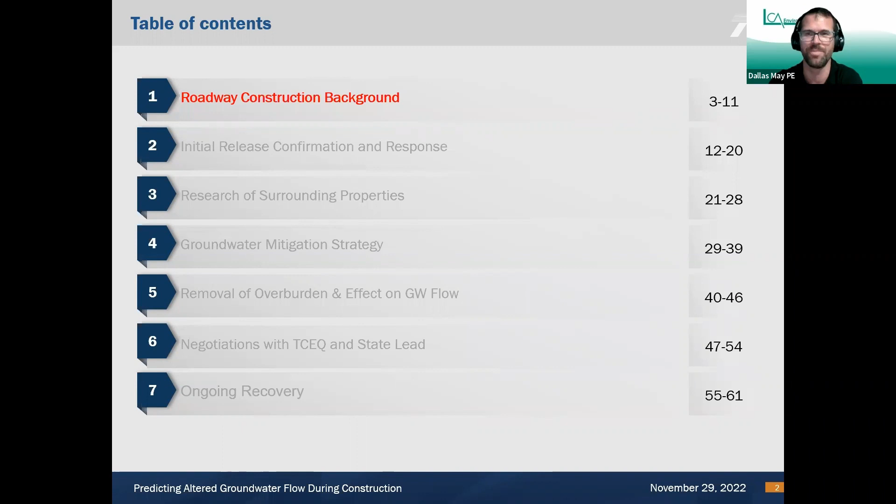Thank you, Mark. As Mark said, I'm Dallas May, an environmental engineer with LCA Environmental. I was asked to share a little story with y'all today that I think you'll find a lot of fun. Our story is broken up into little chapters that I'll read out to you.

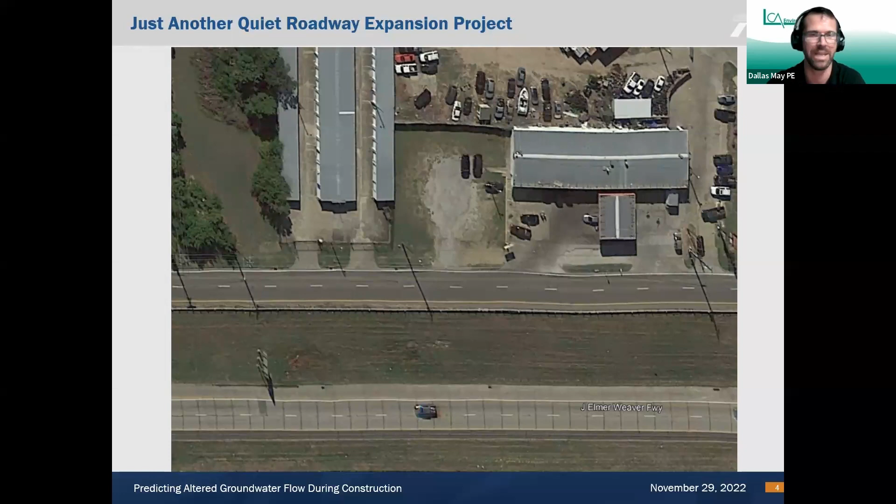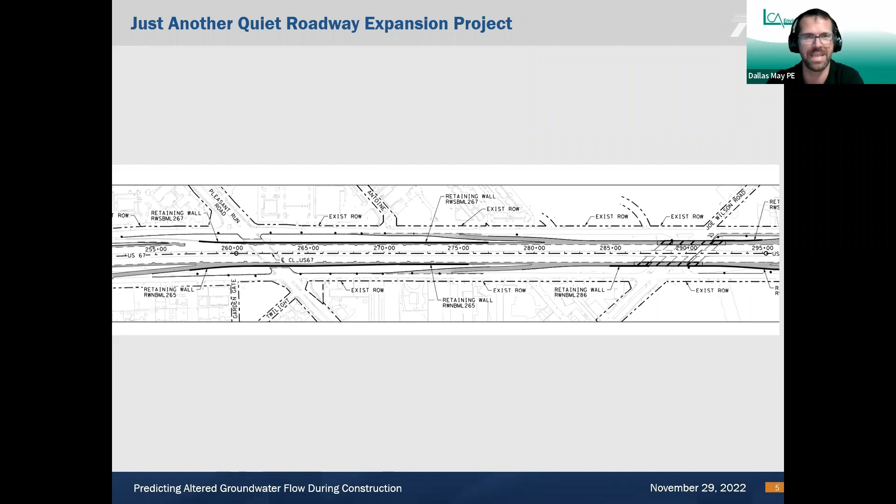The build alternative would expand the existing facility from 4 lanes to 6 lanes, including 3 12-foot main lanes in each direction. Also included in the plans was the addition of a new entry ramp coming off of Pleasant Run Road. No new land acquisitions were needed for this project. All in all, this is a pretty classic TxDOT highway expansion project. And like a classic TxDOT highway expansion project, the build alternative schematic concept was approved and passed on to the design engineers.

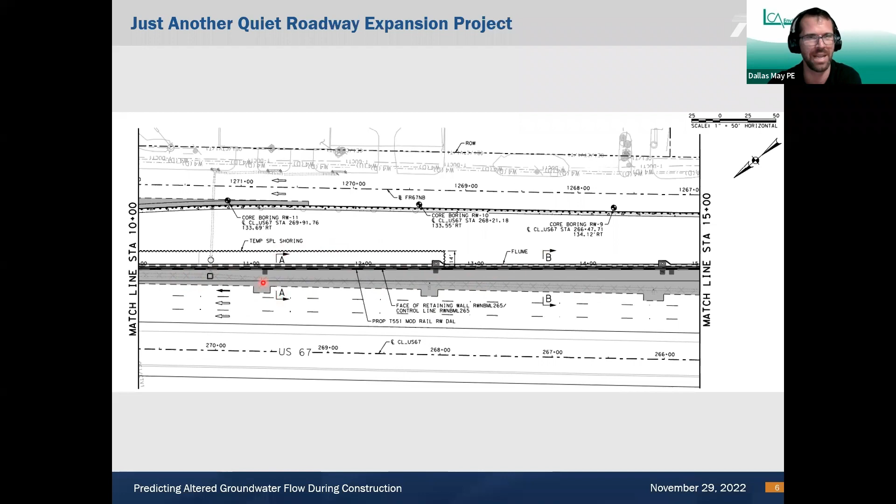The engineers decided they were going to need to cut back the slope a little bit and install some retaining walls in order to get their 3 12-foot main lanes. Geotech borings were drilled and engineering plans were finalized, and the project went to bid. So they're cutting back this area and installing these two different retaining walls, retaining wall A and retaining wall B.

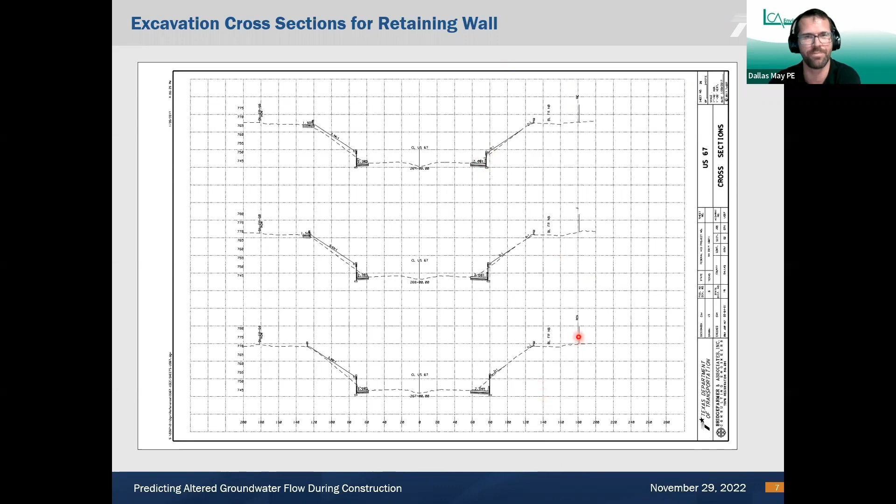The final roadway cross section didn't actually change all that much. The retaining walls would be about 10 feet high, and just a little bit of cut was ultimately going to be changed from the existing schematic. Just a little bit of slope was going to be taken based on the cross section. But of course, most everybody tuning in today is going to know that there are in fact different types of retaining walls. Our retaining wall that we're interested in required quite a bit more excavation beyond what would be suggested by the cross section.

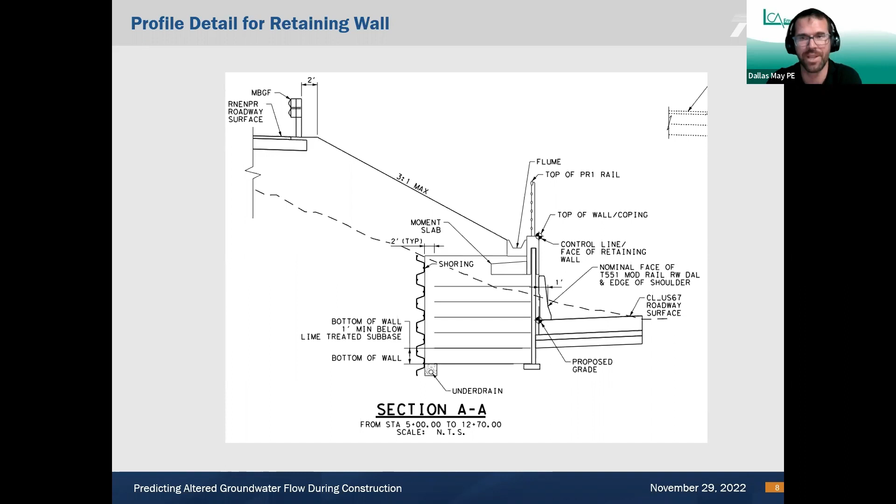In this retaining wall, the space between the shoring and the face of the wall was filled with crushed concrete. So you have the face of the wall and the shoring where they're going to be cutting out. An under drain was to be installed at the base of the shoring. At the back of the construction, the under drain was placed to collect the shallow groundwater that would be flowing in from the freshly cut rock face. So all in all, what was originally a simple design has become a significant modification to the ground.

So the engineering stuff is out of the way, and we go to bid. The plans were bid by TxDOT as a cost plus contract. A winner was selected, and construction began in 2017. In the fall of 2017, the contractor began excavating out our retaining wall.

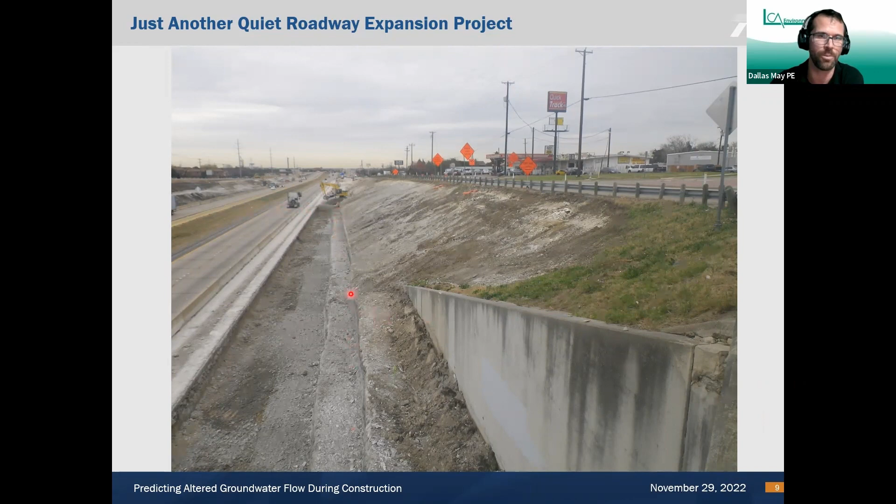Now, with construction full speed ahead, it's clear that the excavation of the slope is creating quite a significant change to the existing ground surface. The geology that was hiding behind the ground is starting to divulge some of its secrets. You can see some clear layers of geology, some sandy clay at the top, some weathered limestone start to show, and alternating layers of competent limestone begin to form.

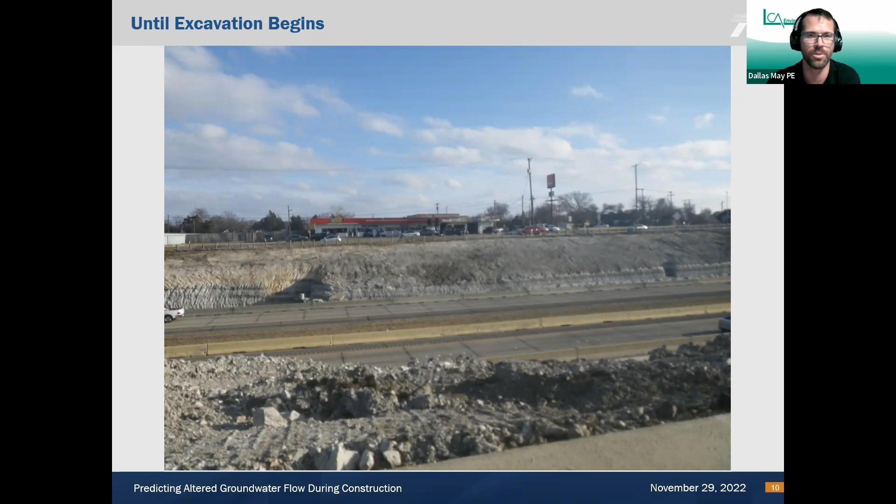Again, the excavation of the slope of the wall is significantly altering the current geology, the current land surface. We're really cutting back from this road now. And again, the geology is starting to show what's underneath. Here's another picture that shows about 8 feet of clay and silt at the top, followed by a strata of weathered limestone, followed by competent limestone underneath.

Right at the top of the weathered limestone, the groundwater is beginning to seep into the project area. This is not a surprise. This was expected. Multiple geotech borings collected in this location showed that groundwater should be expected in this area to seep in. TxDOT engineers were well aware of this and designed this into their retaining wall structure.

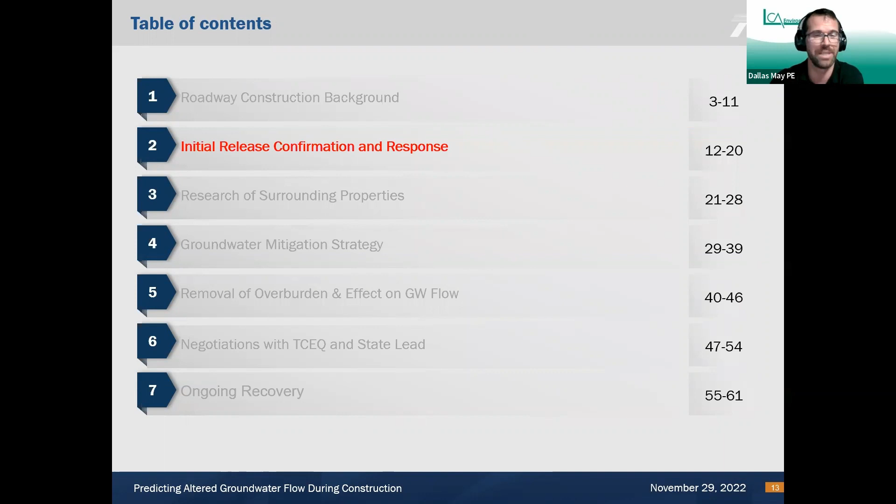Chapter 2, the initial release, confirmation, and response. The contractor's employees immediately recognized that the groundwater was pretty funky as soon as they started cutting into it. It had an odor, it had a visible rainbow sheen, and was leaving an unusual rust stain on the limestone.

The contractors here did everything that they should have done and everything right. They immediately recognized that something was a problem. They took immediate action to prevent additional contamination release and dug a shallow trench to collect the contaminated groundwater and contacted their TxDOT project managers. The TxDOT project manager called Environmental, ENV, in Austin, and ENV in Austin called us out to investigate.

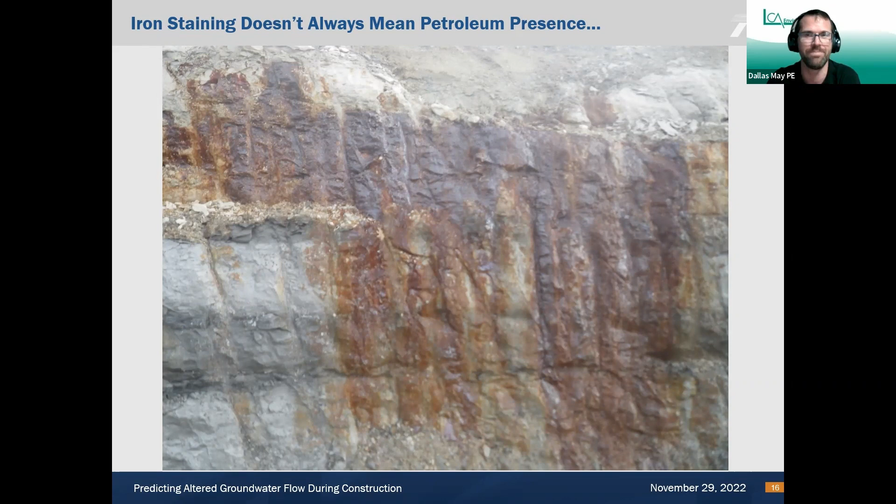That rust staining was particularly interesting. Chemically, what's happening here is that the rust color is indicative of a reduced iron environment, likely from anaerobic microbial decomposition of petroleum in the groundwater. This isn't always the case, but there are processes that can cause this. But in this case, it started to look pretty suspicious. There's a lot of red staining pouring out of the rock.

What's nice about this rust is it gave us some very good clues as to where to expect to look for contaminated material, contaminated groundwater. This will come in handy in the future. We'll just put a pin in that and come back.

So LCA received our work authorization to investigate the impacted zone, and in December of 2017, LCA determined that the groundwater was seeping from that thin, weathered, fractured limestone approximately 5 to 8 feet below the natural ground surface, and that it did in fact contain petroleum hydrocarbons, likely originating from a Quick Track service station about 100 feet southeast and up gradient from our impacted zone.

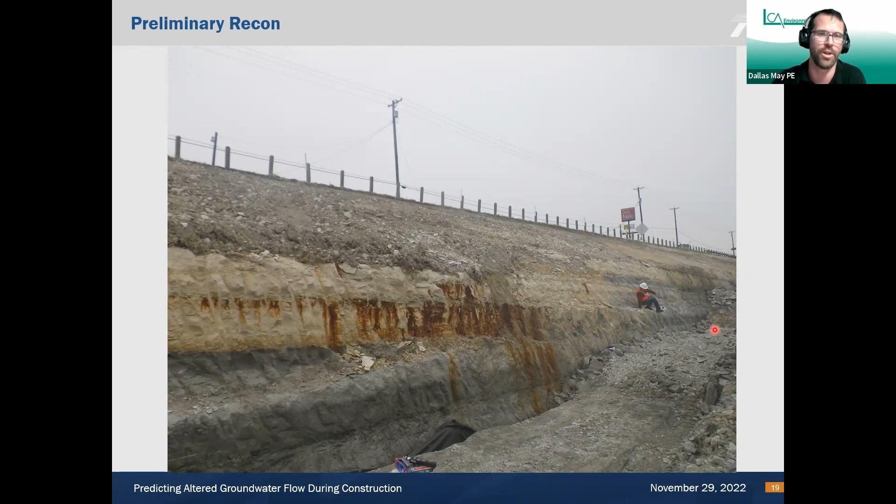Again, the contractors did everything that they should have done. They immediately recognized the problem and they took immediate actions to prevent additional contamination release. But this is still a cost plus contract. And you can imagine that the poor, sad contractor is now sobbing to TxDOT and telling everybody that this is just unacceptable and holding up the project. And so we know that this project can't stop.

We run our initial sampling and confirm gasoline compounds in the groundwater. We do have to protect the public, the environment, and the construction workers from the hazardous chemicals that are now flowing into our project area. And we have to keep the project moving forward. So we come up with a simple plan of site reconnaissance with soil and groundwater sampling, trenching to capture the seeping groundwater. We prepared a soil and groundwater management plan and managed the soil excavation and disposal.

Dealing with the soil was pretty straightforward in this case. There's no time to catch someone up, so I personally directed the excavation in the impacted areas and monitored and directed the segregation of impacted soil, which primarily consisted of that layer of weathered limestone, from non-impacted soil, which is most of the other soil.

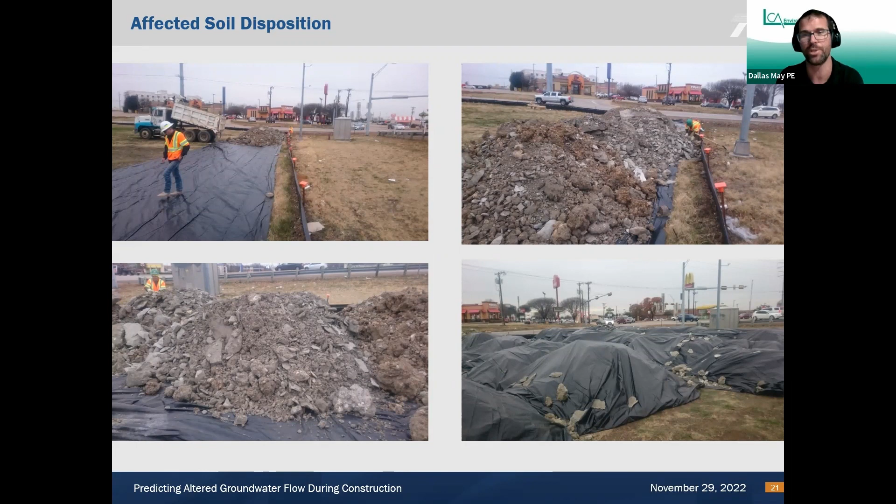So LCA received our work authorization on December 5th, and we kept the project going, and we had the wall fully excavated and ready for construction of the retaining wall, and all the soil profiled and disposed of by January 7th.

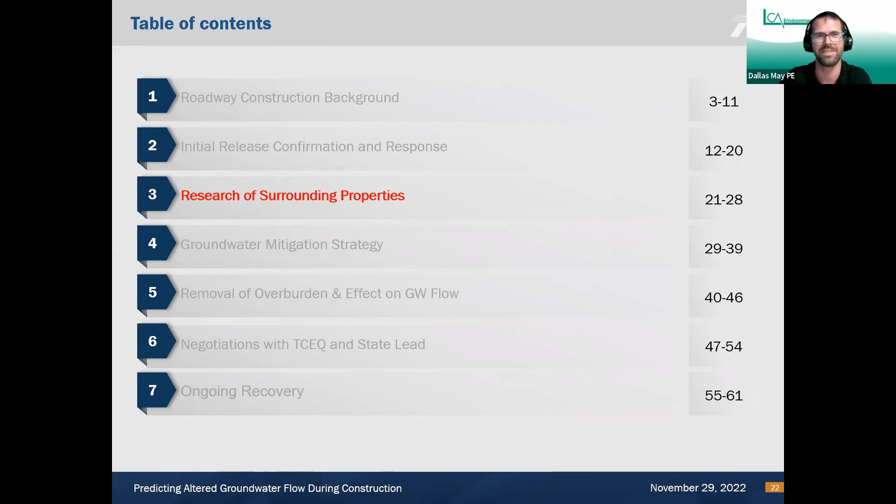Which brings us to chapter 3, the research of surrounding properties. So we're going to go back in time just a hair to when this project was still in the planning phases. For this roadway project, and for most every roadway project, TxDOT has the process to identify hazardous material risks like this, called a hazardous material initial site assessment.

So we recommend these hazardous material initial site assessments on all TxDOT projects. It's very similar to an environmental site assessment for commercial transactions. We recommend this even when a project isn't purchasing additional right-of-way. So this ISA was performed by Hicks and Company, and it included a regulatory database review.

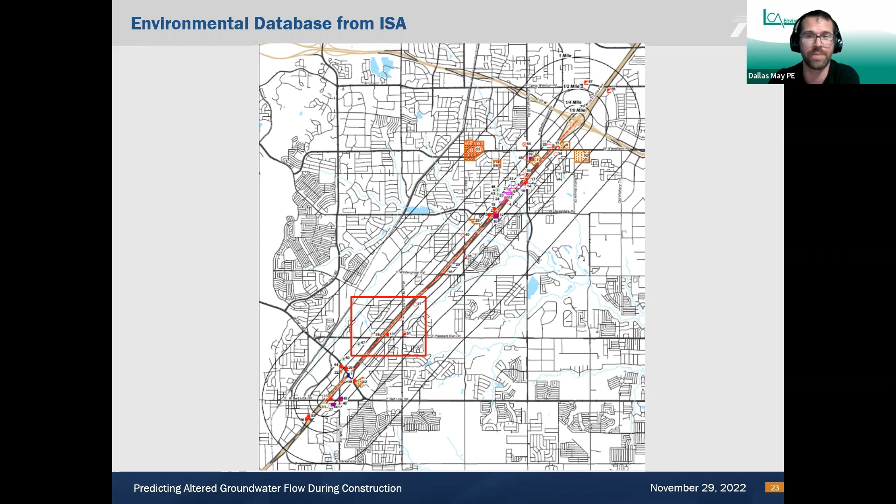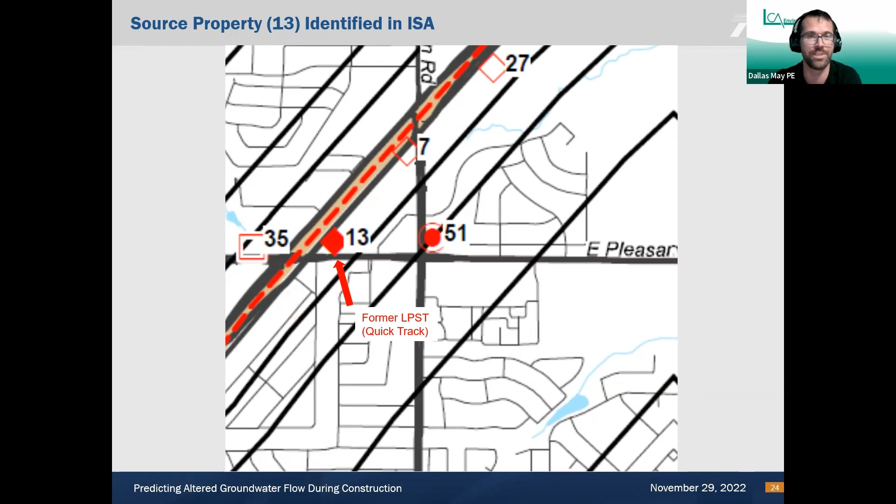Further, in the regulatory database review, our gas station, our Quick Track, was identified as a potential leaking petroleum storage tank adjoining the project site. So the question had to be asked, how come we are just now dealing with this during construction? Well, in the ISA, the site was determined to be a low potential for impact.

And the ISA read, based on no additional right-of-way proposed from this property, the topographic gradient in relation to the project area and case closure, the site is considered a low environmental risk. Now, as much as I would love to be able to throw a competitor under the bus here, that's not where the statement ends. The statement continues, should design plans change to include excavation activities adjacent to the facility, this site would pose a higher risk to the possibility of encountering affected material.

So all in all, this site was not missed in the ISA. Hicks and Company were working with the design schematics that they were provided in the early planning stages, which they included in their appendices in the ISA. And those schematics didn't show at the time that there would be significant cut for a retaining wall. That was added on later.

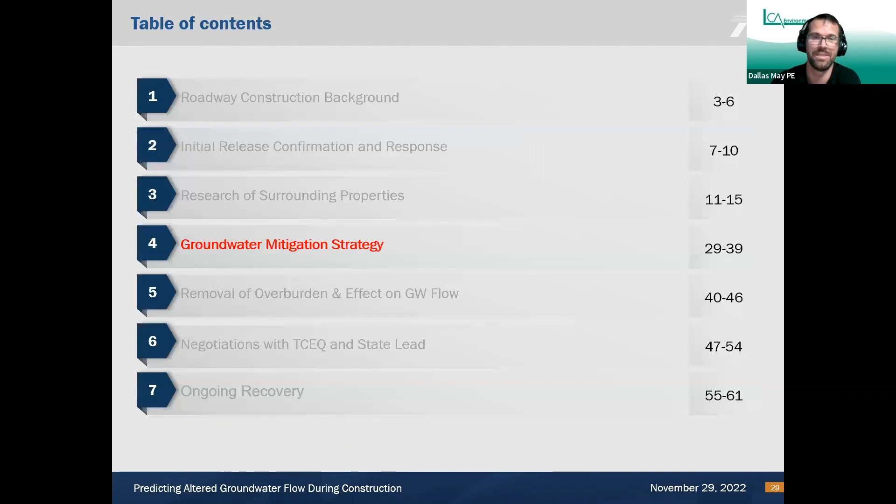They left this note, they left this warning for anybody that would heed it. And ultimately, additional excavation activities is exactly what would happen. So back to the project. Groundwater mitigation strategy.

So let's go back to that retaining wall detail. With the soil contamination now taken care of, we still had to deal with the incoming groundwater. The groundwater hasn't stopped flowing. If the wall was constructed as originally designed, the underdrain down here would serve as a collector for the contaminated groundwater and then pipe it and release it directly into the environment. Obviously, that could not be allowed to happen.

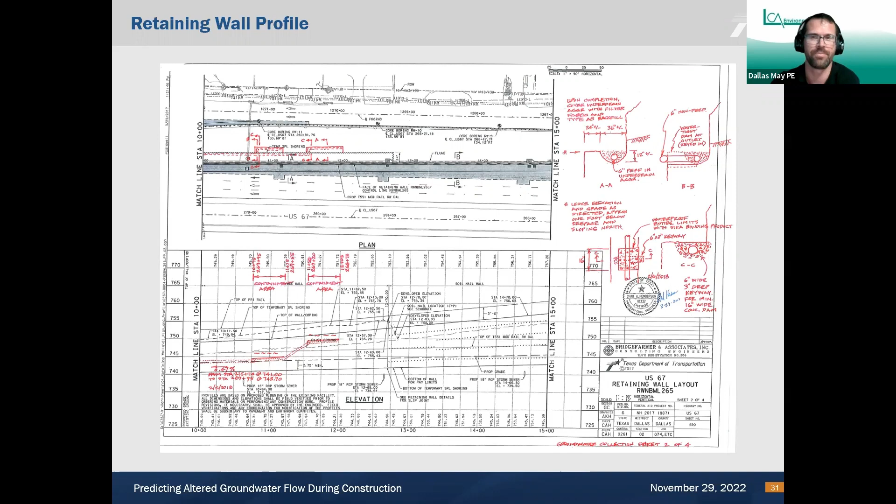So the plans had to change. We helped HNTB modify their original retaining wall plans to create a permanent trap and collector, which would collect and segregate the impacted groundwater and prevent it from being released into the environment with the regular stormwater. The modifications worked as follows.

We would dig out a new collector trench above the underdrain to collect and trap the contaminated groundwater. The trench would be lined with HDPE, a plastic liner, to prevent seepage through cracks in the limestone. And a slotted pipe was to be installed in the trench that would carry the contaminated groundwater to a collection sump where it would be accessible to a vac truck. And that way we could segregate off the contaminated groundwater from the clean groundwater and the stormwater.

So here's another look. We have a perforated pipe inside a trench that would need to be cut out of the wall. Down here is the non-impacted underdrain.

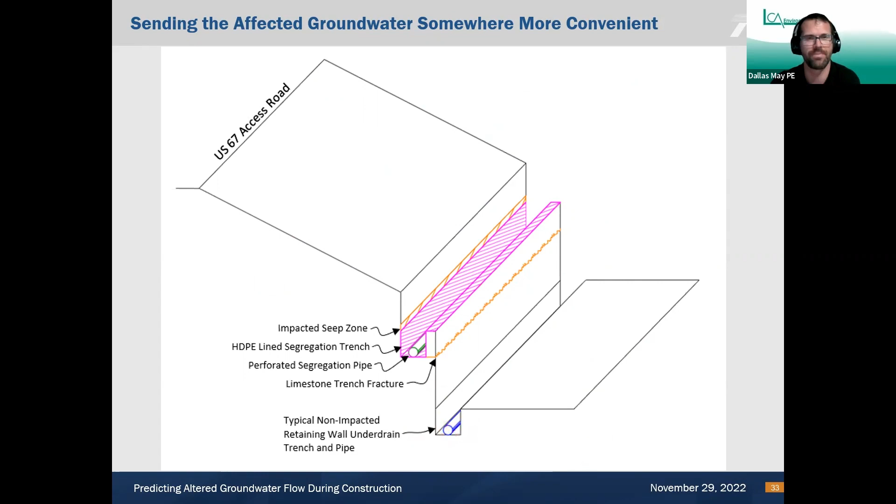So the next question we would have to answer is, where do we install this? Luckily, we had very good geologic clues with that red staining. The rust staining provided the exact location where the contaminated groundwater was confirmed to be seeping out into our project area. And the contaminated groundwater was confirmed through laboratory testing.

If we could just block off just these areas, we could optimize our collection system and minimize disposal cost. We don't want to be disposing of groundwater that isn't impacted. So we focused on just the areas that the geology was telling us that's where the contamination is coming from.

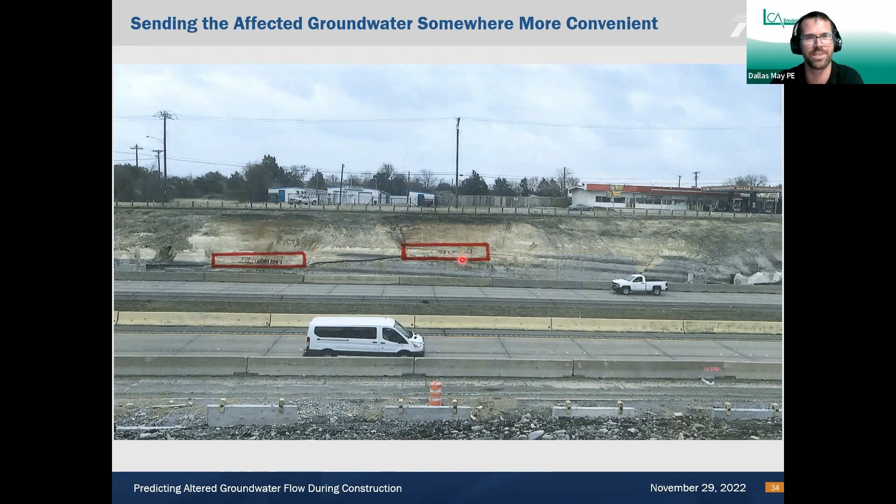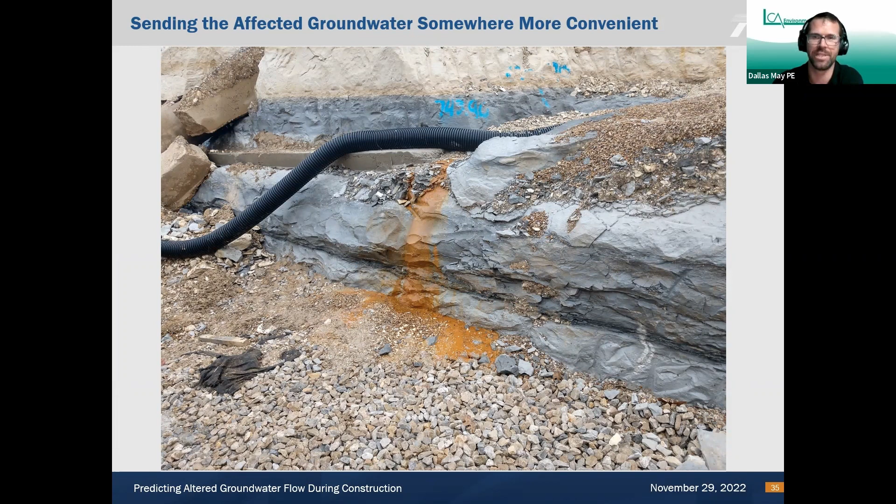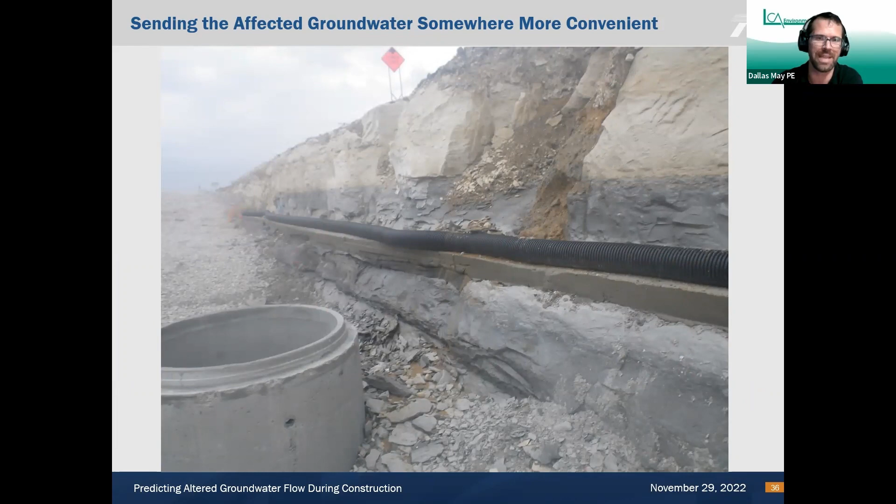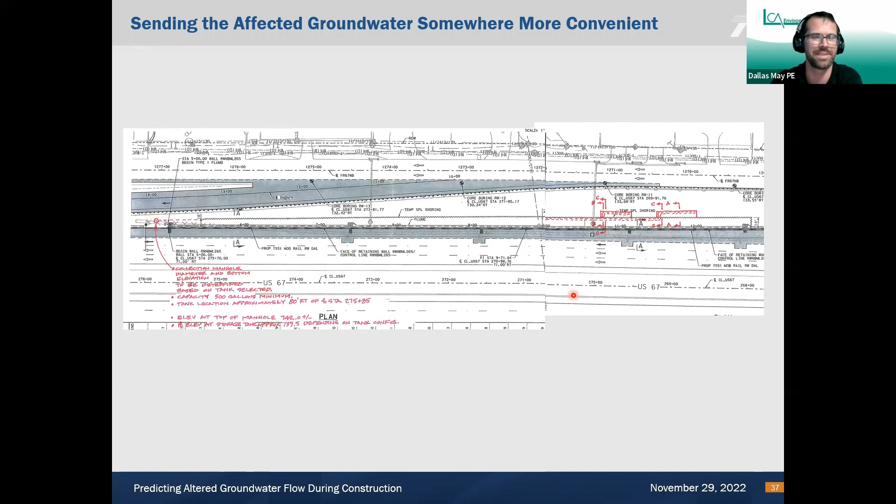For the collection system, a clay cap was added at the end to trap the contaminated water that was being collected in the trench. And a shelf was constructed to hold the segregation pipe that runs all the way down the hill to a location where it could be accessible to a vac truck. And that was quite a run, actually. It ended up being over 700 feet to get to the place where it could be accessed by a vac truck.

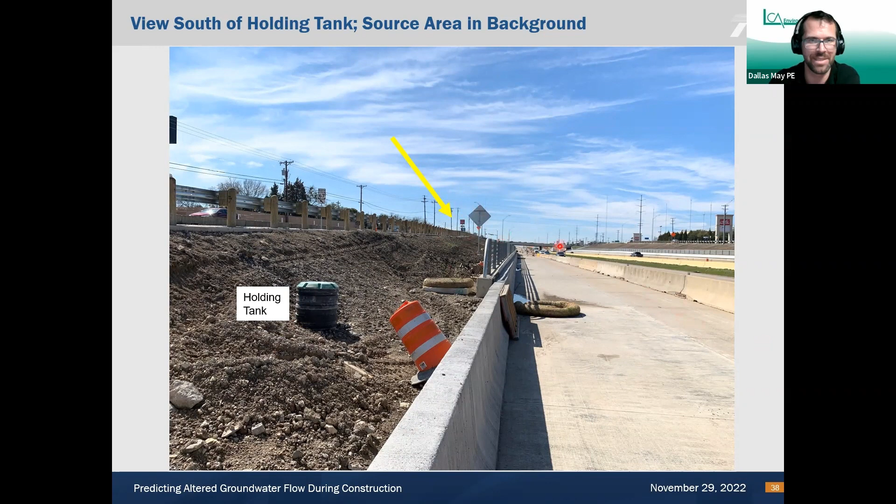At the end of the new drainage pipe, the contractors would install a holding tank with a manhole, and the holding tank had to be constructed so that a vac truck could drive up to it and clean it out, because the impacted water wasn't going to stop flowing anytime soon. And the yellow arrow back here, just to give you a sense of distance, that's our gas station. And you can also see the overpass for Pleasant Run Road. Here's another view of the location for our holding tank.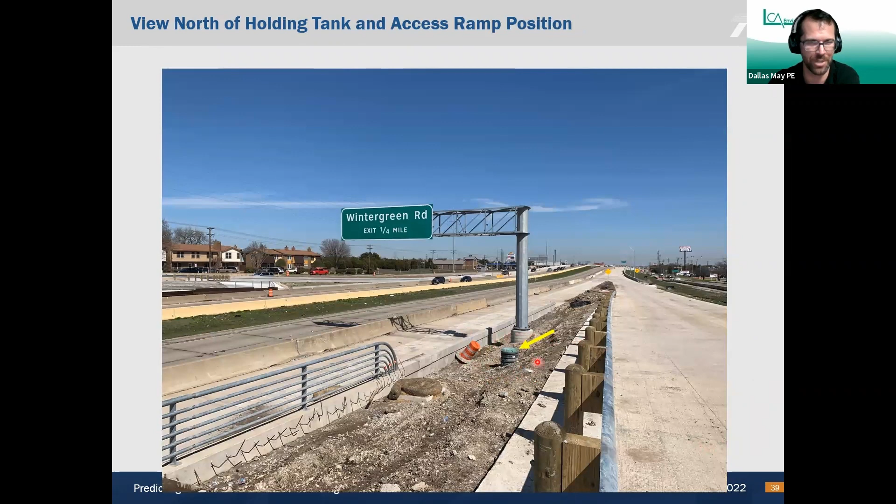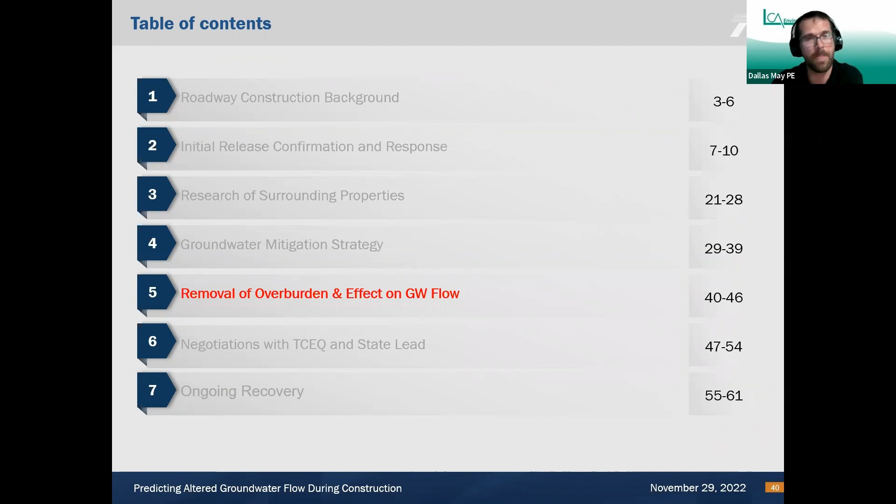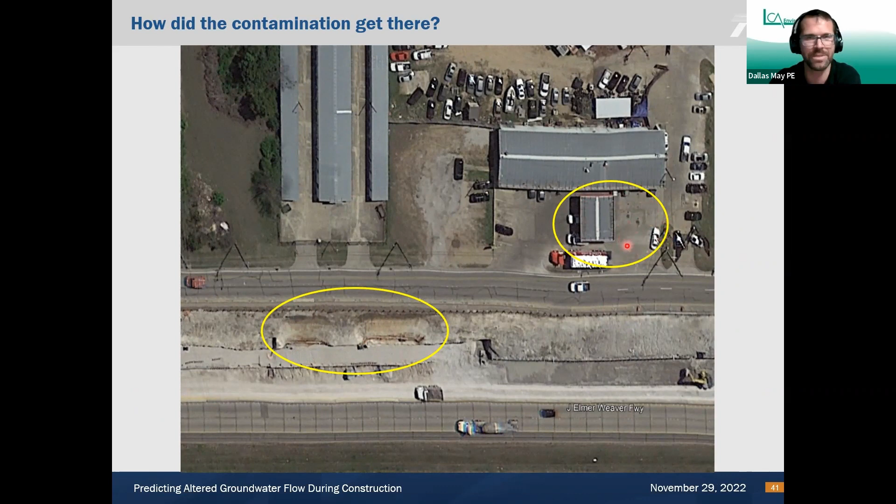Which brings us to chapter 5, the removal of the overburden and effects on groundwater flow. So how did this happen? If you're paying close attention, you might have noticed that our contaminated zone doesn't really look like it's all that near to the gas station fueling facility. How did groundwater get from here all the way back over here? Well, if you look carefully, there's another clue in the geology.

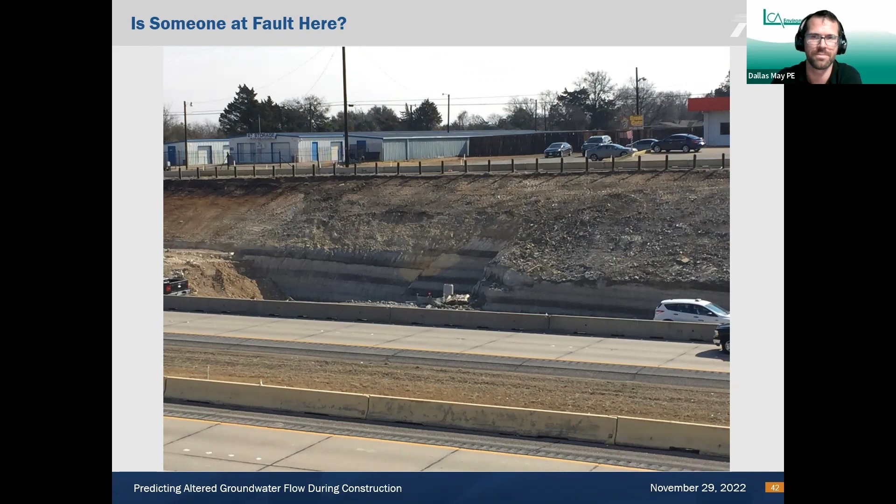You'll be hard-pressed to find a more textbook fault than this, especially with the very nicely colored layers of competent limestone. Yeah, humans have not been the only ones moving dirt in this location. At some point in the past, the ground shifted and caused this fracture fault in the limestone. This fracture forced up the limestone near to the gas station and caused a much more complicated groundwater flow pattern.

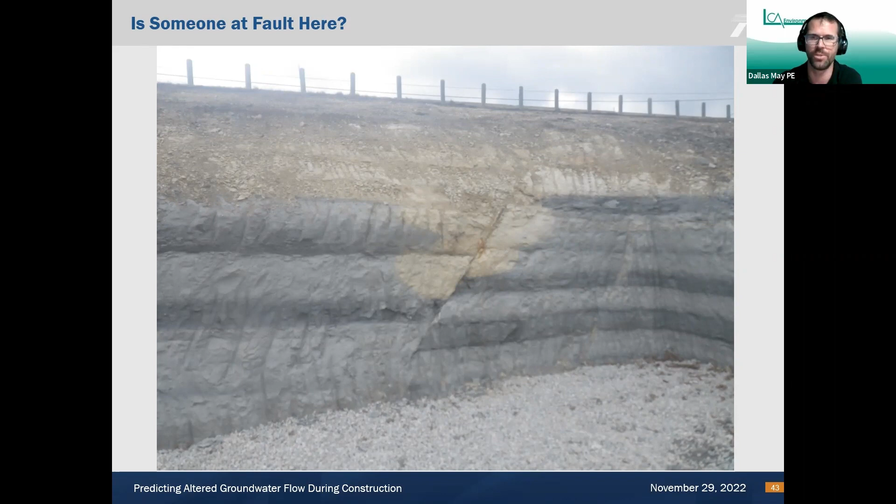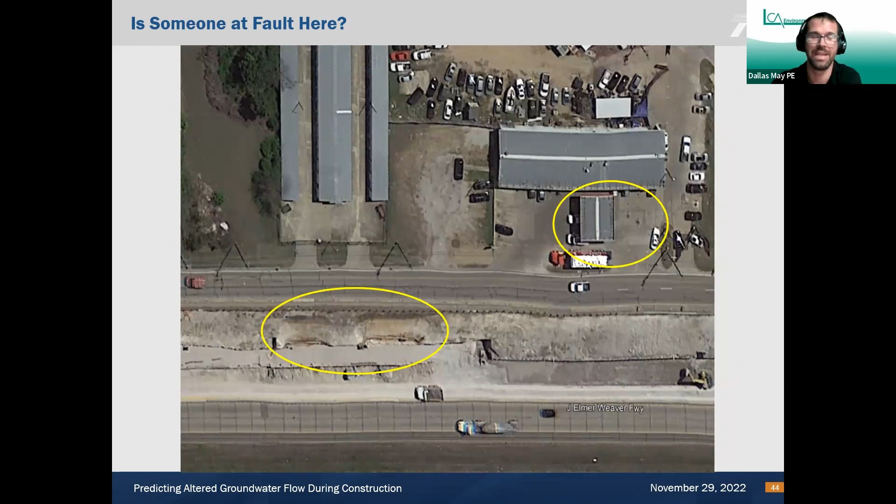When the contractors began excavating out the side for the retaining wall, they created a new low pressure zone, which would become the highway. That pulled the groundwater back in to our construction zone. Yeah, cutting into the wall, as you see here, created a new low pressure zone for the groundwater to flow into and ultimately empty out into our highway construction.

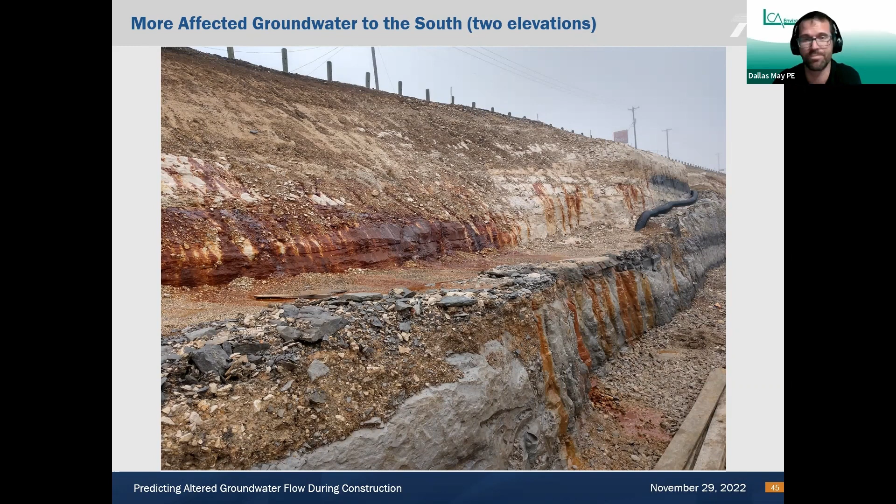So with our collection system in place and operational, TxDOT was now going well above and beyond their call of duty in collecting, trapping, and disposing of the contaminated groundwater. The problem was identified in December, and the entire system was designed and constructed and fully operational by February. And more importantly, the contaminated groundwater was not being released into the environment. So great, everybody pat yourselves on the back. We did a good job, right?

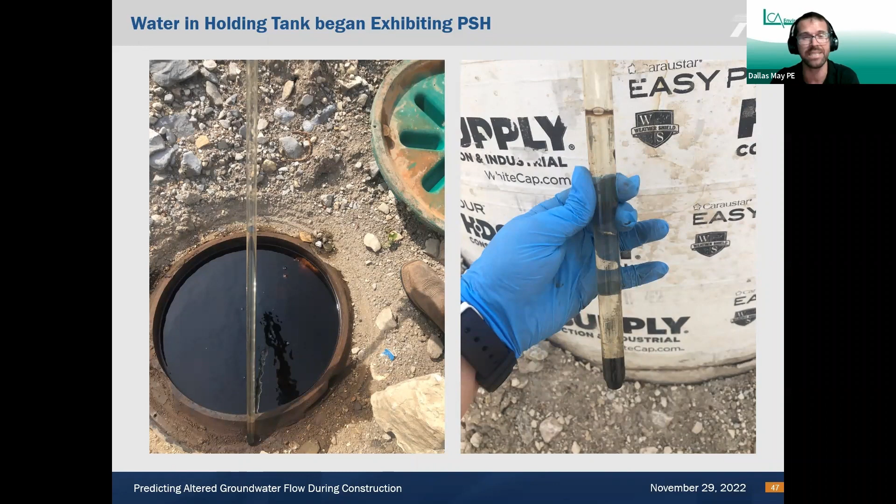Except there's a problem. This is an engineered remediation system. Why is it TxDOT's responsibility to remediate a release that they didn't cause? It was caused by a private business. Which brings us to Chapter 6, negotiations with the TCEQ and the State Lead Program.

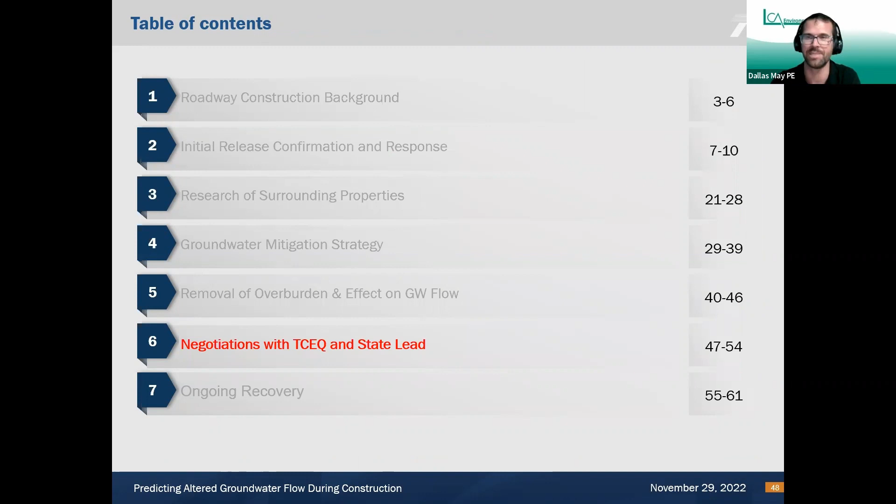So TxDOT continued to send out a contractor to clean out the holding tank and dispose of the impacted groundwater for another whole year. Every few months, their TxDOT contractor would collect a sample and run it to a lab. The contamination wasn't decreasing. So we sent Lonnie Gilley, the local TCEQ petroleum storage tank guru, and the TCEQ in Austin, a letter clearly spelling out everything that we knew about the site and everything that TxDOT had done for this site up to this point. And we told the TCEQ that TxDOT wasn't going to do this forever.

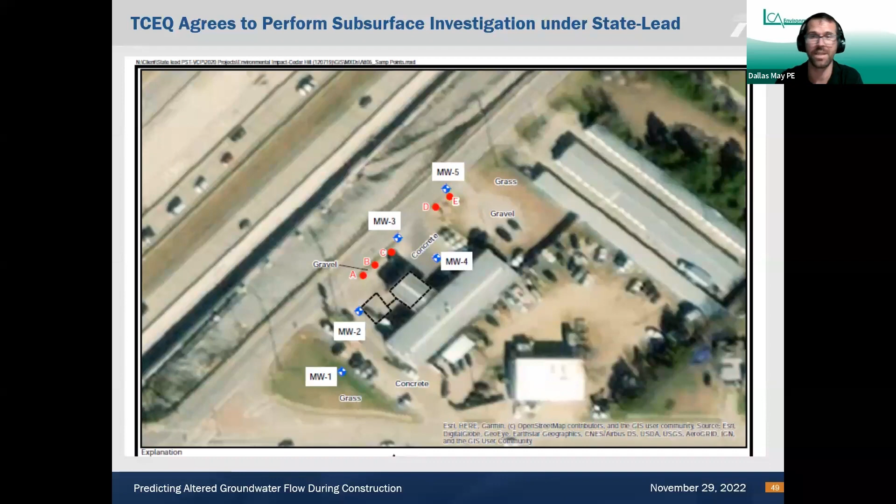So we convinced the TCEQ to reopen the LPST case and place this site into the state's LEAD program, which is their leaking petroleum storage tank cleanup program for remediation. After multiple meetings, we had to send another letter to TCEQ explaining that, again, TxDOT is not in the forever business with this, and we will be decommissioning this system very soon.

Then, in September of 2019 — remember, we had this system fully operational and constructed in February of 2018, so this is now September 2019 — the TCEQ sent out one of their own contractors with the authority to directly investigate the release.

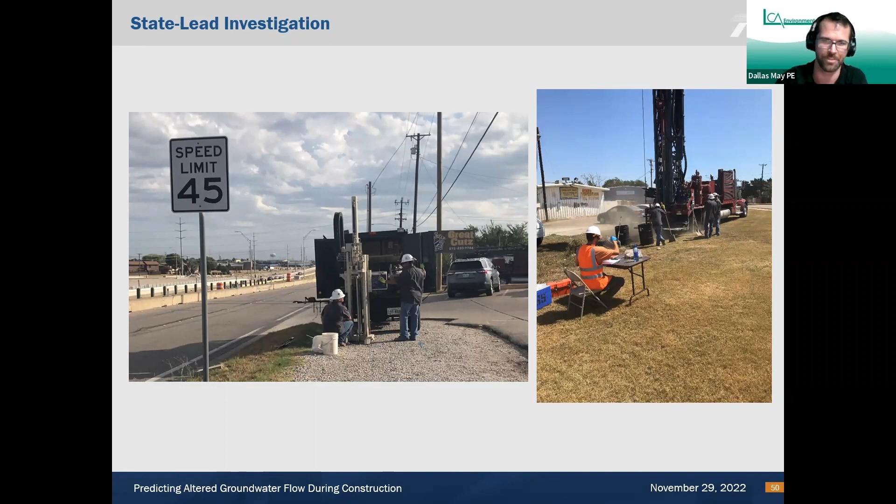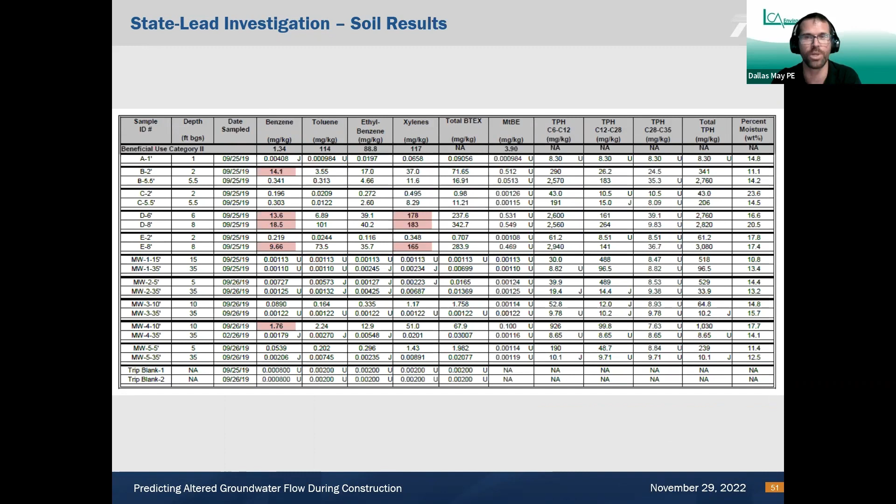And sure enough, just as we predicted, very high concentrations of benzene and petroleum contaminants were identified in the soil around the gas station and in the groundwater too. These numbers alone are high enough to suggest the presence of free petroleum product, meaning a gasoline release, in the soil around the gas station.

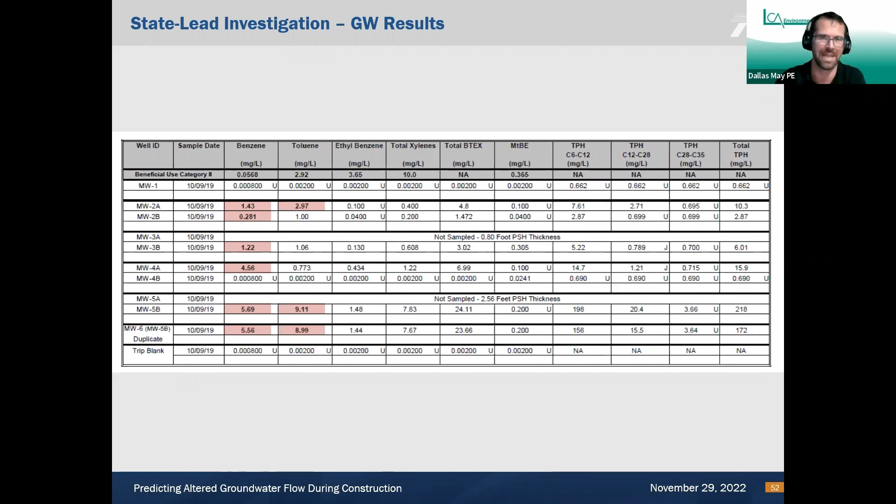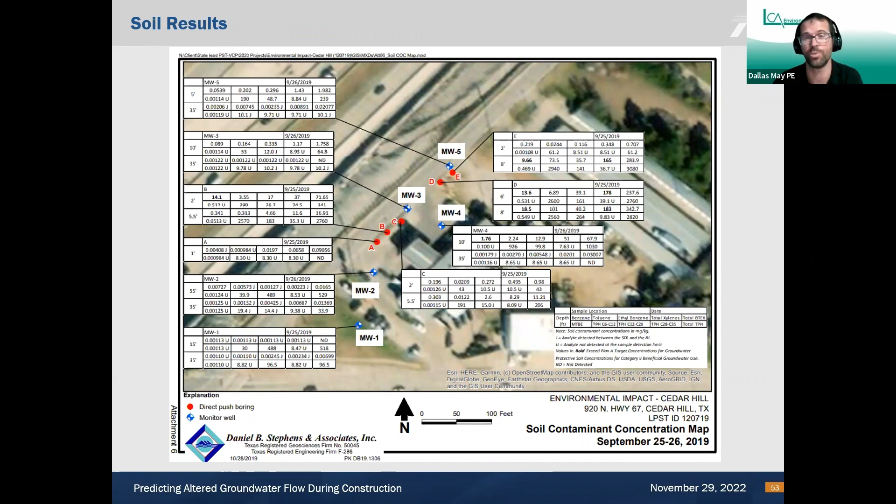And lo and behold, the soil contaminant concentrations increase in the direction of the gas station and toward our excavation area. Same with the groundwater — the highest concentrations were in the direction of our excavation area. The TCEQ's contractor confirmed the presence of phase-separated hydrocarbon fuel in the groundwater.

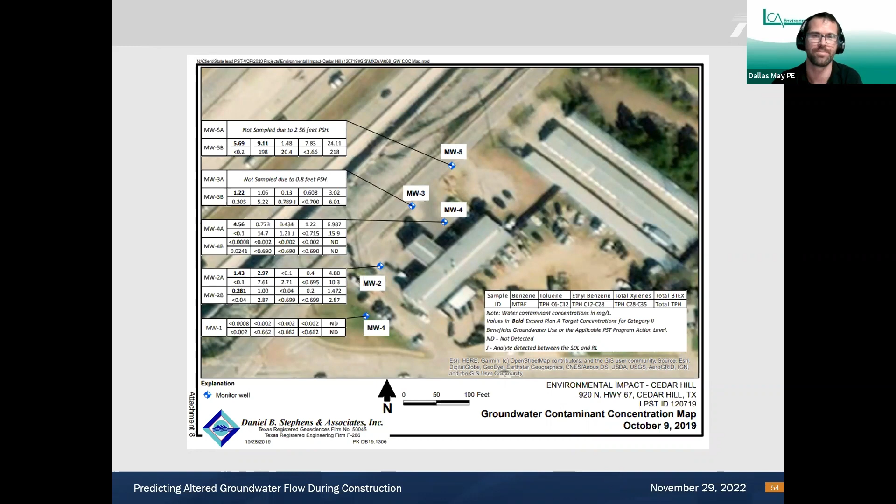A groundwater gradient was produced for the site by the TCEQ's lead contractor, and if you notice, this isn't really an intuitive groundwater direction pathway. As we correctly predicted at the time, this unusual gradient was caused by fractures and the fault in the competent limestone rock, and it just so happened to lead the contaminated groundwater directly to our excavation area.

And then, when the contractors began cutting into the hill to install their retaining wall, they released the pressure from the overburden and pulled the contaminated groundwater directly into their excavation area.

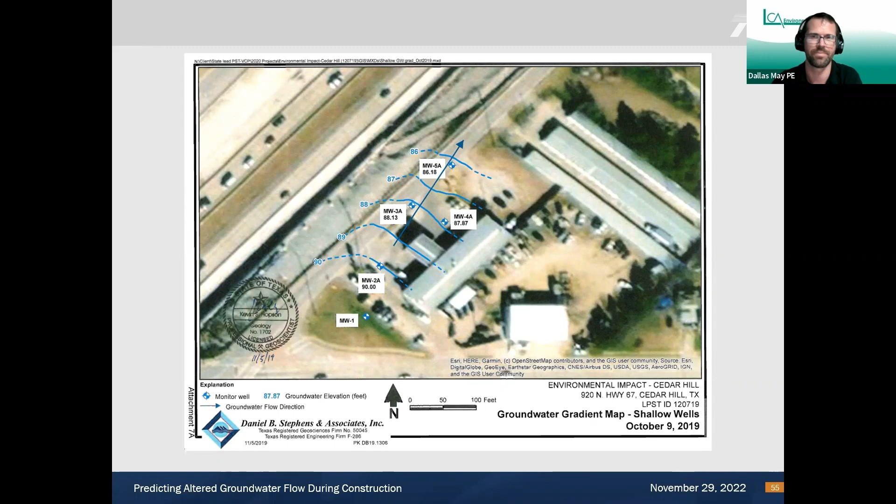Chapter 7: ongoing recovery.

So in October of 2019, with the highway construction at the site nearing completion, the TCEQ finally agreed to take over the recovery operations from TxDOT.

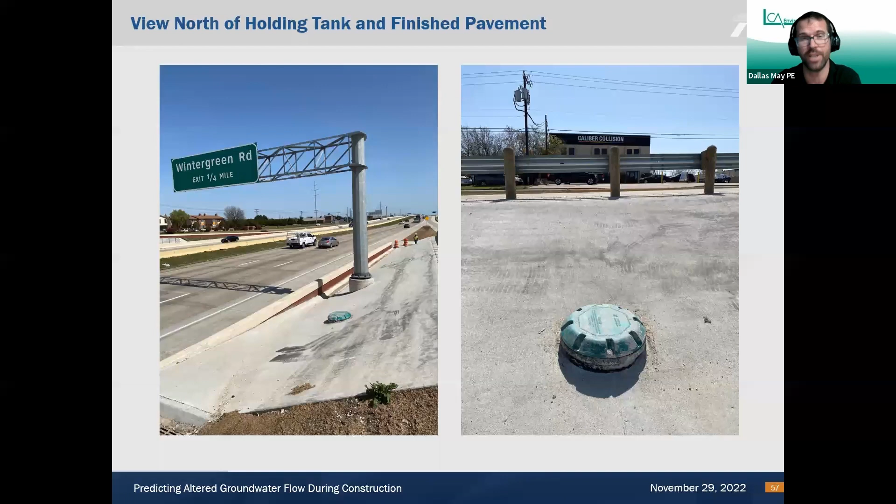So we asked the TCEQ to keep us posted on the recovery actions. We received regular updates on their weekly recovery events through February 2020, when our work authorization finally timed out for this project. The final groundwater recovery event we were informed of was on the 7th of February, 2020.

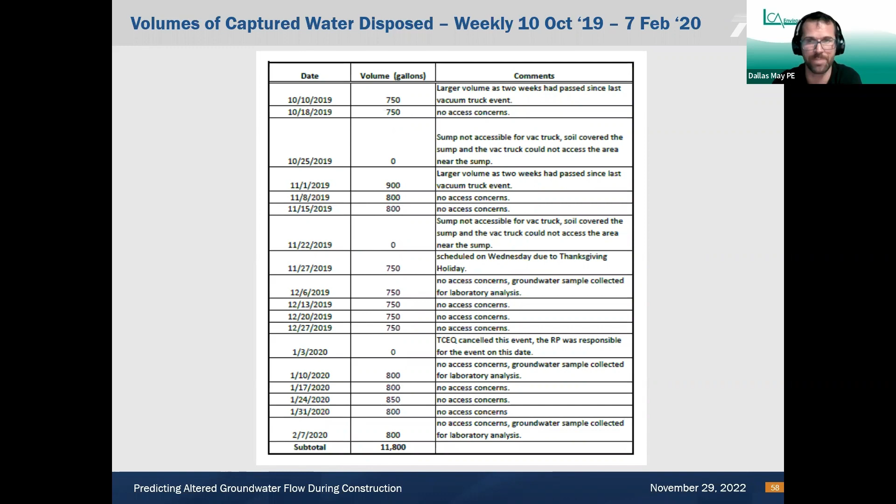And it's now being paid for by the responsible party. We did a final site recon on Friday, February 21st, 2020, and received a copy of the final recovery report from the TCEQ on the 25th of February, 2020.

And in that recovery report, the groundwater emptying out into our collection system still showed significant contamination. It was contamination that TxDOT didn't cause, but that TxDOT went above and beyond to trap, collect, and remediate. And it is contamination that is no longer TxDOT's problem.

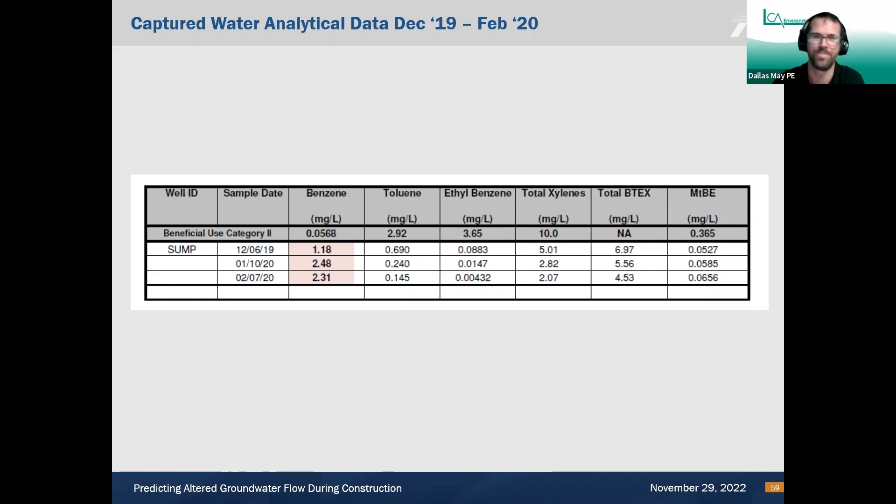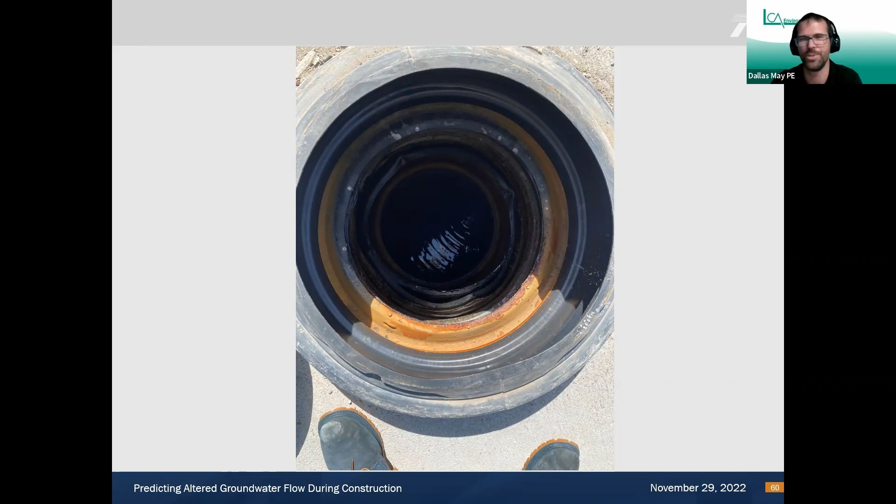And you can still see our little collection system quietly hidden away at the top of an unassuming entrance ramp to US Highway 67 in Cedar Hill, Texas.

So what's the moral of this little story that I've told you? The first lesson is to understand how a project changes the geology.

Just as considerations must be taken for how mechanically modifying your geology will affect the pressures on the structures themselves, also consider how doing so will affect contaminant migration pathways.

And in the event that you have contamination that seeps out into daylight, that contamination must be contained and can't be allowed to just be released into the environment, where it can cause hazards to construction workers, the public, or the nearby environment. Sensitive receptors must be protected.

And if your client, or TxDOT for example, identifies that, they don't have to be in the forever business for somebody else's contamination. The TCEQ is an available resource you can call upon to help hold responsible parties accountable for their own releases, even if it's a release that's entering your work area.

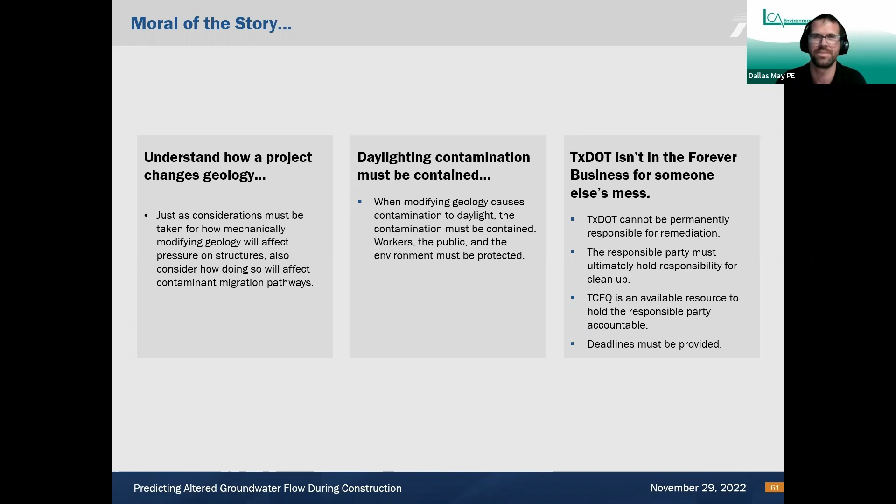But the TCEQ works on their own timelines, and deadlines must be provided to them. Which concludes my little story.

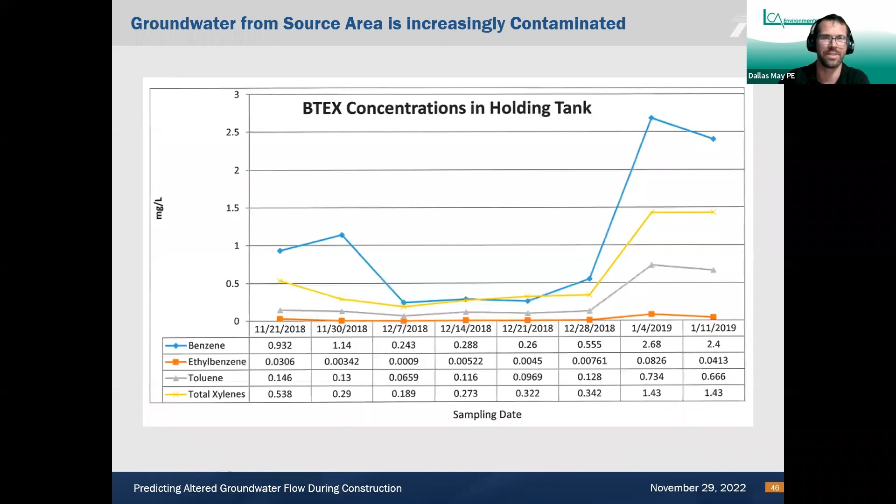Yeah, so the competent limestone definitely acted, as you said Mark, as an aquitard, and we didn't see any groundwater flow or identify any contamination. There were no field indicators of contamination below the fractured limestone and the weathered limestone just below or just above the competent limestone. I think that's a good answer, Dallas.

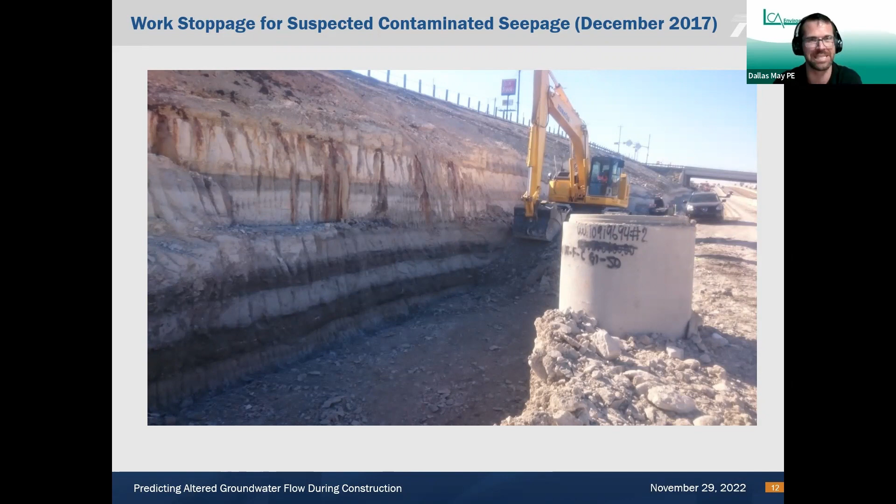Can you flip that slide real quick? Let's see. Did we get that? Where is that photo? Oh well, here you can see how the contractors dug out this trench to try to immediately trap the contamination that they identified. And the groundwater was freezing up in their trench as we were digging it out.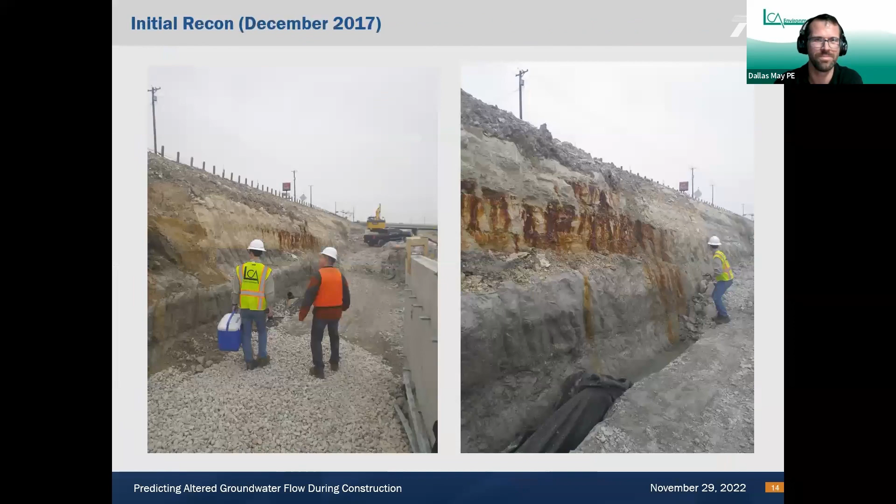Yeah, but I think you had a better one than that, Dallas. I did. Where's it at? It wasn't very far into it. That one? Nope, but that's all ice. That's all ice. Let's see. Oh, this is a good one.

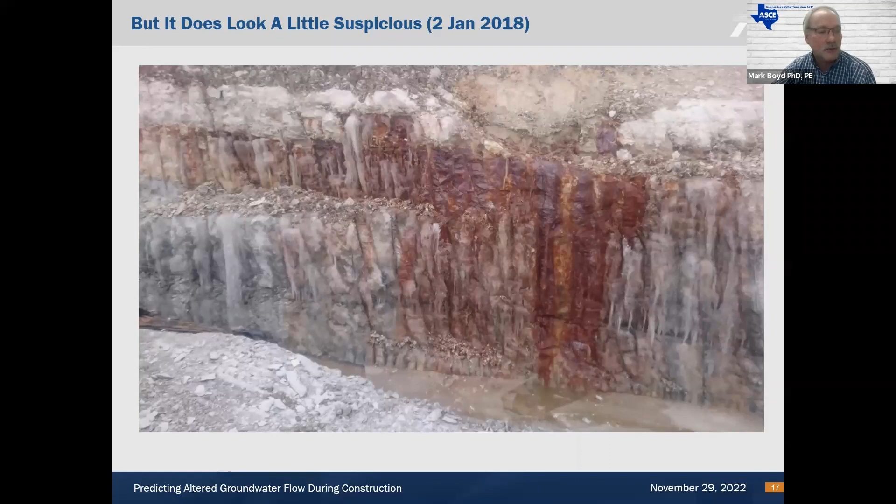Well, at any rate, Dallas, as you said, TxDOT does not check the weather before they pick up the phone and call us out on the site. So they don't worry about old guys like me getting cold. It was pretty doggone cold that morning. And it's a very unique circumstance - there it is - where you see a contaminated groundwater seep daylighting that's also frozen.

Certainly had never seen that before. I had personally never seen that. That's not common in Texas.

No, it's not. I thought there were a few other questions, Dallas. I think maybe those were taken as part of being very related to the same questions. Those were outstanding questions because they show the audience was really thinking about what we were doing out there, what the long-term consequences could be, and whether we put any thought into this.

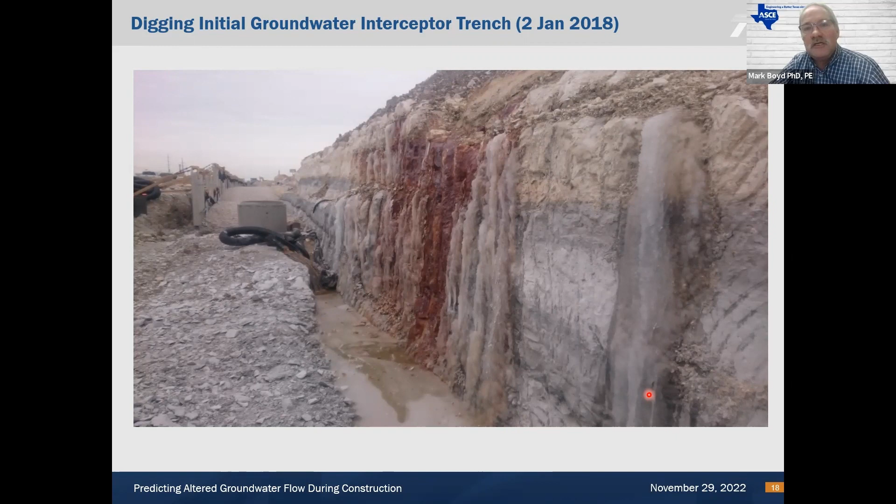Here's one more question, and then we could probably stop there. Can the oily wastewater be treated in situ using bacteria? That's the question. Sure, so the biggest problem with doing that is, yeah, there are...

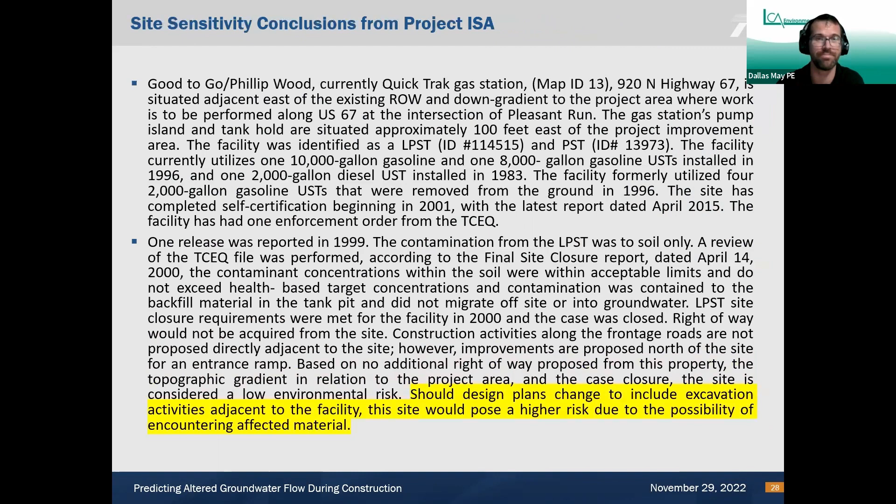In situ remediation techniques like injection - the biggest problem for us is that we were not working for the responsible party. We didn't have access to the tanks. So that's why we had to push that onto the TCEQ so that they could begin to work with the responsible party and force them to implement those types of injections or dual phase extractions or other processes they need to do to clean up their act.

We can only help fix the contamination that was immediately migrating onto the TxDOT right-of-way. All right, I would add though, Dallas, that what is actually happening is natural attenuation. There's some biological activity - obligate anaerobes at work, iron reducing bacteria already at work, remediating the site all by itself.

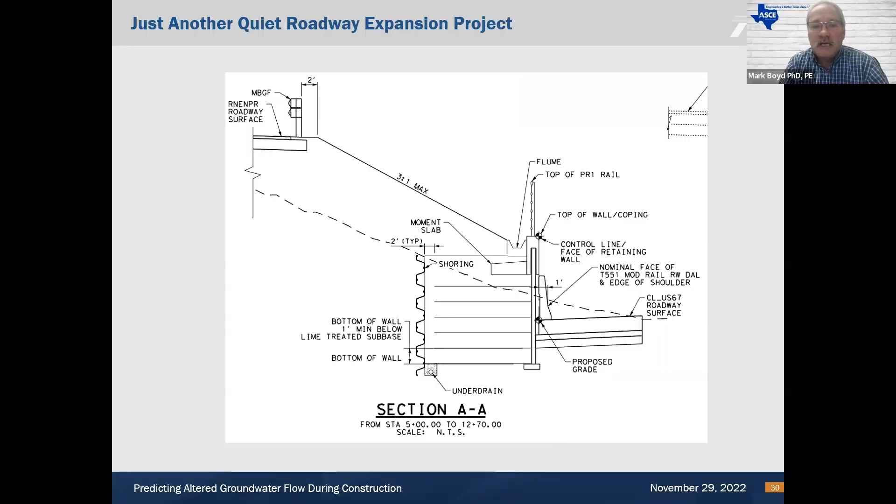Here's a very interesting question. The final grade of the main lanes probably did not change much during construction. How come the contaminated plume did not show up years earlier? Dallas? Well, there's a bit of a debate of whether or not it did or not.

We did find a Google Street View photo along US 67 right at that spot that shows a suspiciously extra patch of green grass right in our contaminated location. A photo is a photo.

So whether or not it was daylighting already is a little bit of a question. The other potential answer for why it wasn't identified before is because it was stable at the time. It was only when our contractor started changing the ground surface that the groundwater migration pathways really changed and then rapidly restabilized themselves.